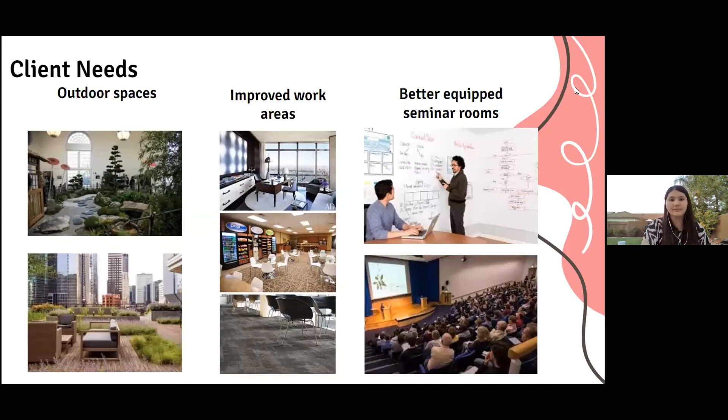To incorporate all these things, they clearly don't have enough space at their current site, so we decided to relocate them. The light blue box is their first site, and the new site we want to relocate them to is the red box. By moving them away from the heart of downtown, we gave victims a more accessible building they can actually visit, with a nearby parking structure providing accessible parking and better access.

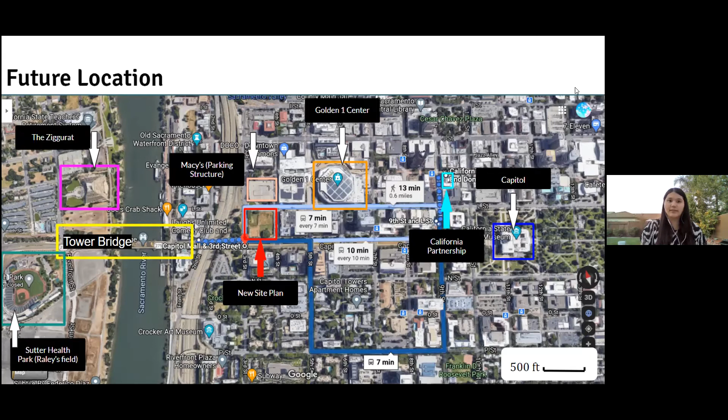Also, by moving them away from the heart of downtown and putting them next to a well-known location like the Tower Bridge, we give victims a well-known place where they can find the building. This also gives victims from downtown and the suburban areas a place to find comfort and unity. So let's get into this site plan.

Hi, I'm Ethan. This is our site plan showing the red box, a 300 feet by 250 feet lot. Our building is about 250 feet by 200 feet. The public can enter the building through the southeast corner of the lot. After entering from the south, we are in the outdoor garden. Underground parking can be accessed from the northeast corner.

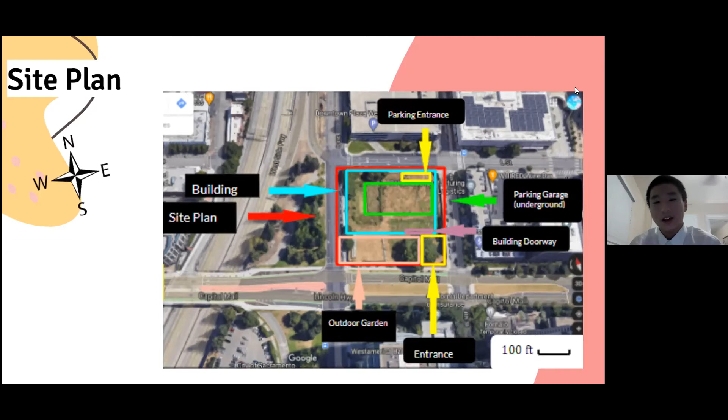Next up, Camille is going to introduce the bubble.

Hi, my name is Camille, and this is our bubble diagram. Our client's demands are very important, so I made sure to take everything into consideration, as well as what my teammates thought were important to integrate into our new building.

The first floor focuses on direct help towards the victims. The second floor serves the same purpose, but focuses more on the children. The third floor is for staff members only so they can work in their own office space. Finally, the parking lot will be placed underground in order to save more space on the surface.

Next up, the floor plans will give more details about our new building.

Hey, I'm Amelia, and this is the underground floor that I designed. At the bottom of the ramp, there are 2 security gates to allow for two-way traffic for the nonprofit workers to go in and out. There's also a large double door entrance in the mechanical room to allow a mechanic or whoever may be to easily access the room and bring in larger components the building will need. I also placed 6 handicap spots at the northeast corner of the building, near the elevator and the stairs.

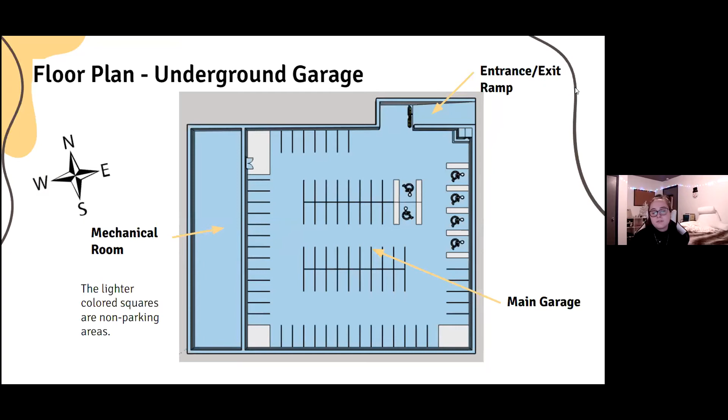Next, we'll have the first floor. Hi, my name's Justin Andriotti. We wanted to put public things like the clinic, the cafeteria, and the lobby on the first floor. The stairs are in the northeast corner of the building. The bedrooms are on the first floor so they can easily access the public things.

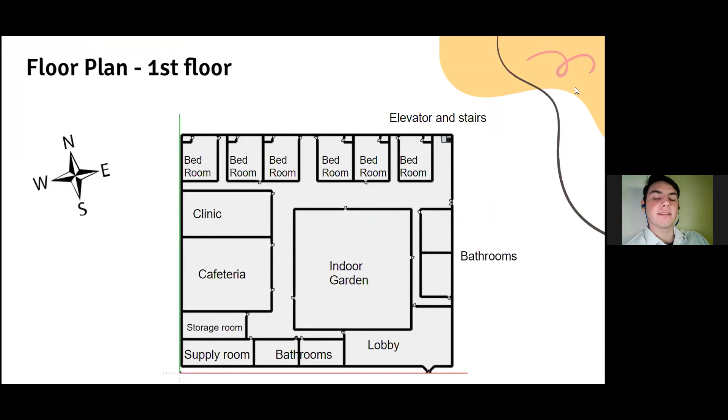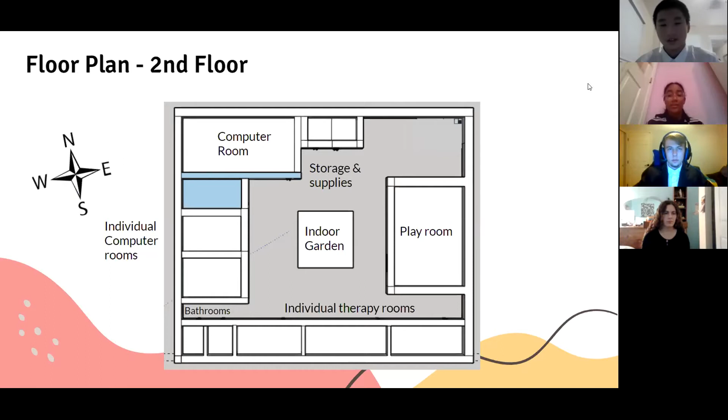Hi, I'm Maria Santos, and I helped work on the second floor plan. The nonprofit organization wanted to have a computer room, so we added a larger computer room and individual computer rooms for privacy. We added individual therapy rooms for victims who wanted to get help but couldn't or didn't want to leave the building. We added a playroom for the children to have their own space.

Next is the third floor. Hello, my name is Jackson Wetzel, and I worked on the third floor. As Camille said, we decided to reserve the third floor for office space for all the staff working to help those in need. The people who worked for this nonprofit preferred to have a window in their workspaces. They didn't want to feel cramped and secluded in an average office cubicle, so they were given full office spaces, each being 150 square feet, so people would have plenty of space while they work.

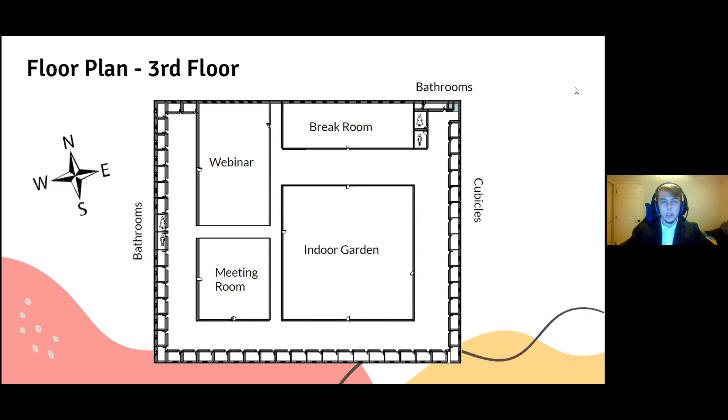Adequate space was also given for meetings and webinar sessions. There's also a break room near the stairs, as well as another indoor garden, both places where employees can unwind after long hours of work. And with all the floors covered, what do they look like all together?

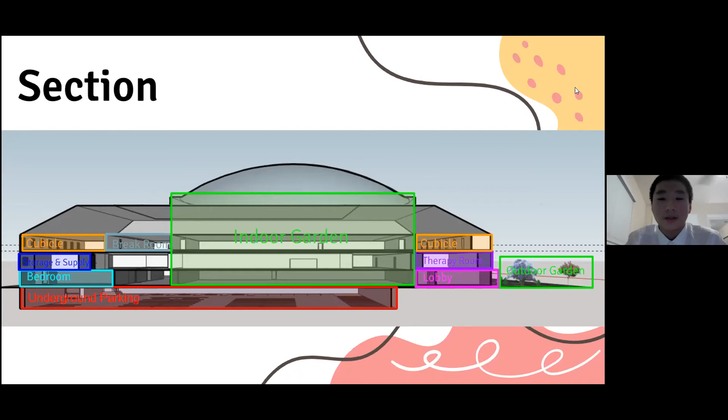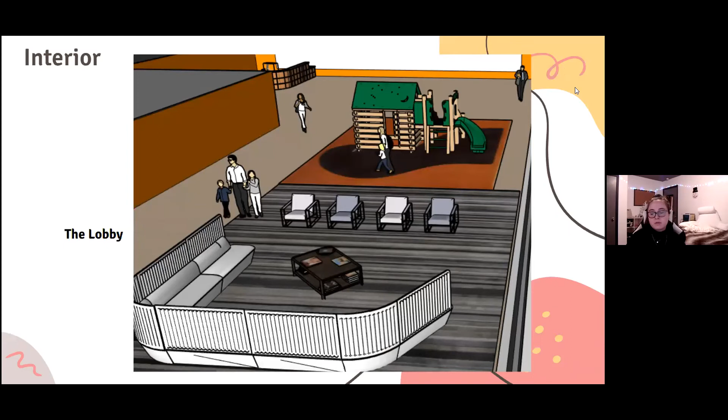Hi, I also did the interior design for the lobby. I made the walls bright orange to make the room feel friendly and inviting to any adult or child that may enter. I also placed a playground with a larger seating area that can view the playground, so there's a way to keep children occupied while their adult or guardian can do paperwork or talk to anyone comfortably, and still be able to keep an eye on the kid or kids that they brought in.

This is the front garden of the building. You can see the entrance to the right. This garden was created for people to feel at ease to relax during the day.

The garden is enriched with multiple plants and is very pleasing to the eye. There is also a seating area close to the building where people can work outside or simply have a lunch break. And to top it all off, the park is centered around a small pond which is complemented by a beautiful bridge that ties the garden together. It is a very pleasing sight that people will enjoy when they walk to work.

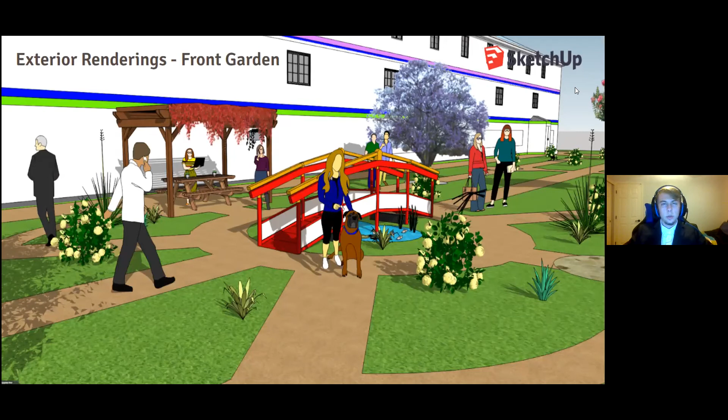And with that, why don't we look at the entrance? With the entrance, I wanted to show how people entered and exited the building. I wanted to also show the sidewalk, or how the building would be seen from the sidewalk.

The front entrance sticks out of the building so that everyone can see that it is the entrance. We put the nonprofit's name on the front of the building so that people knew what the building was used for.

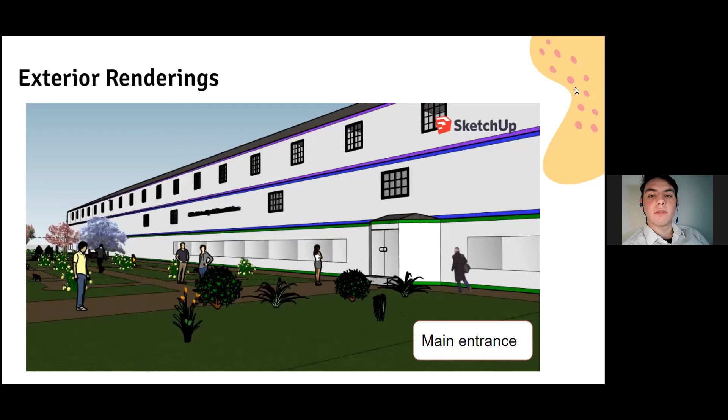Speaking of plants, we wanted to incorporate sustainability into our engineering component because it is one of our building's main concepts. We chose sustainability because we recognize the impact that humans have on our Earth, and we try to counteract that through water conservation.

Implementing a system where the gray water would be directed towards the indoor garden allows us to cut down on the wastewater that needs to be treated, especially since we know that treating water releases byproducts such as carbon dioxide and methane, which all contribute to climate change.

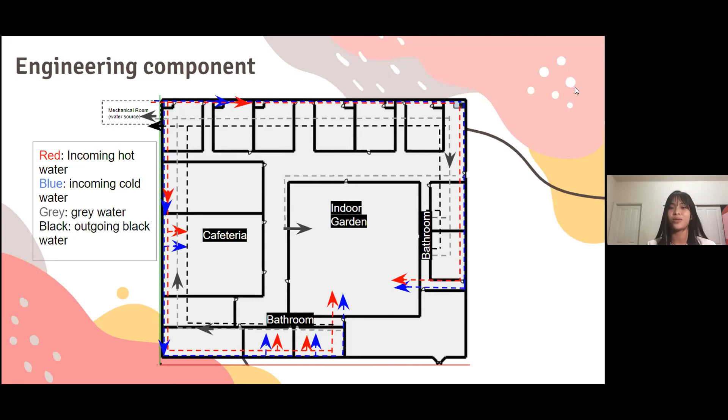Which brings you to our green roof, which serves to extract carbon dioxide from the atmosphere. So with our sustainability goals and the large area on our roof, we decided to incorporate a green roof that allows us to utilize the heating and cooling properties of nature and its CO2 eating abilities.

So using a tank from Petco and some simple supplies from Home Depot, we decided to model the picture in the bottom left. The video about our model will elaborate more on this.

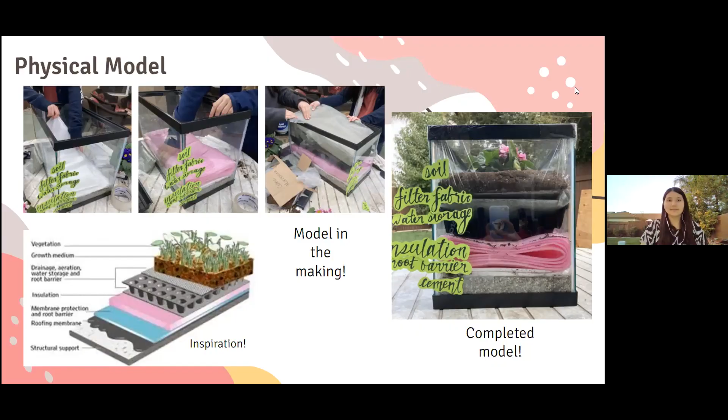Hi, this is River City Create. Today we'll be presenting to you our cut section of the green roof. The main concept for this building was sustainability, and we wanted to emulate those goals into our physical model too.

The green roof harvests light energy through photosynthesis, which in turn cools down the building while also insulating the heat. This process also improves the overall air quality as plants extract carbon emissions from the atmosphere, which will make a small positive impact on the environment and our carbon footprint.

For the roof, the initial layer is soil. The filter fabric only allows water to seep through into the water storage. Using the system allows the plants to have a reservoir of water when it isn't raining. The insulation keeps cold out and keeps heat in, while the root barrier acts as waterproofing, and the cement is the building. This is the green roof.